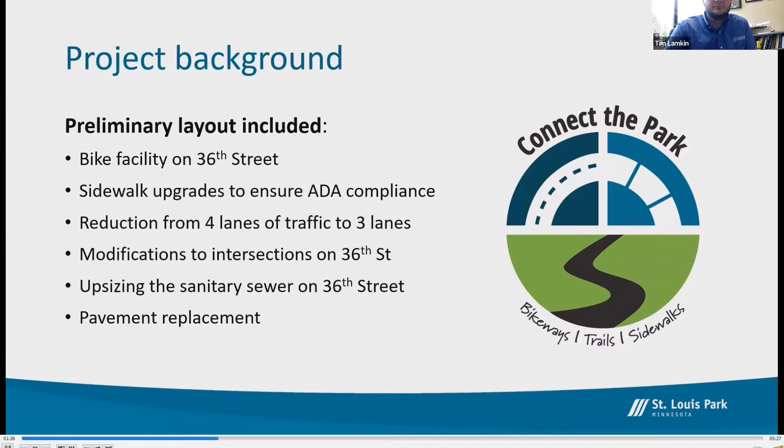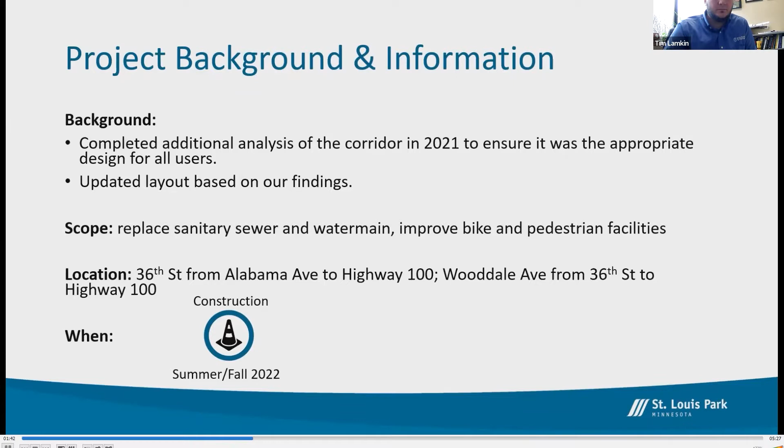The preliminary layout for this project included a reduction in traffic lanes, addition of bike lanes, upgrading of pedestrian facilities, and replacement of the sanitary sewer. With the studies completed, we've better defined the limits and scope of the project. Construction will begin in the summer of 2022 and last until the fall. This project will reconstruct 36th Street from Alabama Avenue to the Highway 100 bridge and include new pedestrian and bicycle facilities, new utilities, and a new roadway surface. The project will also include a new roadway surface on Wooddale Avenue from 36th Street to the Highway 100 ramps.

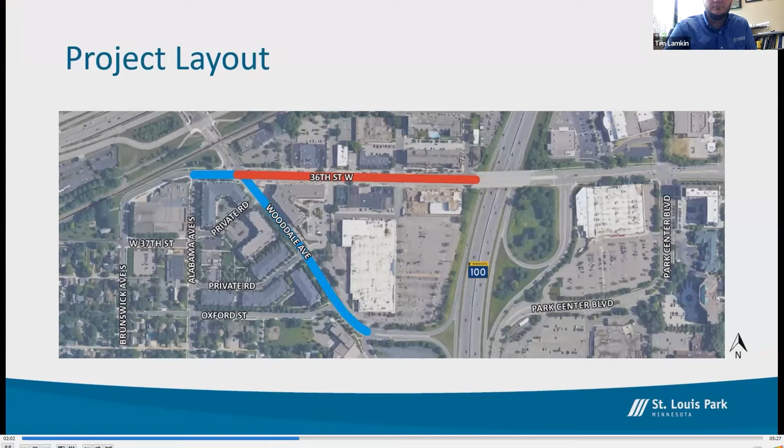36th Street will be reconstructed in 3 stages as shown by the different colors in this figure. Stage 1 consists of Wooddale Avenue and 36th Street from Alabama Avenue to east of Wooddale Avenue. Work for this section includes improved pedestrian and bicycle facilities, signal replacement, and pavement replacement.

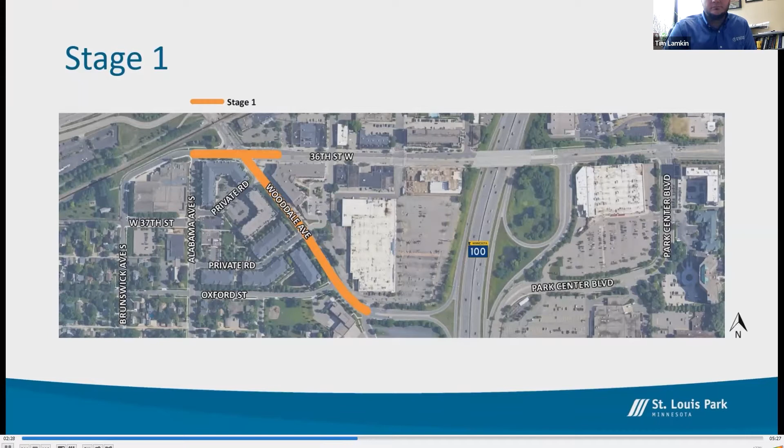The Stage 1 detour for 36th Street is 36th Street westbound to Highway 7 and exiting off on Wooddale. The Stage 1 detour for Wooddale Avenue is Highway 100, Wooddale, or 36th Street onto Highway 100, exiting off at Wooddale, or taking Highway 7 to Wooddale. Access to Oxford Street from Wooddale Avenue will be maintained at all times. One-way access from southbound Wooddale to westbound 36th Street will also be maintained at all times.

Stage 2 consists of 36th Street from east of Wooddale Avenue to west of Zenwood Avenue. Work for this section includes construction of a separated 2-way bikeway on the south side of the corridor. This will connect to a future bikeway planned west of the project as part of the Connect the Park plan. Work will also include full utility and pavement replacement.

The Stage 2 detour for 36th Street is 36th Street westbound to Highway 7 and exiting off on Wooddale. The Stage 2 detour for Wooddale Avenue is Highway 100, or 36th Street onto Highway 100, then onto Highway 7 and exiting off at Wooddale. Zenwood Avenue will remain open to traffic at all times during Stages 1 and 2.

Stage 3 consists of 36th Street from west of Zenwood Avenue to the eastern project limits. Work for this section is the same as Stage 2: adding a separated 2-way bikeway and replacement of utilities and pavement.

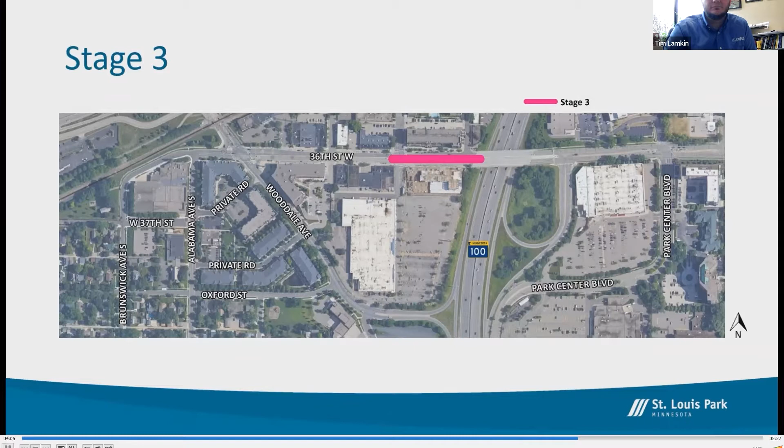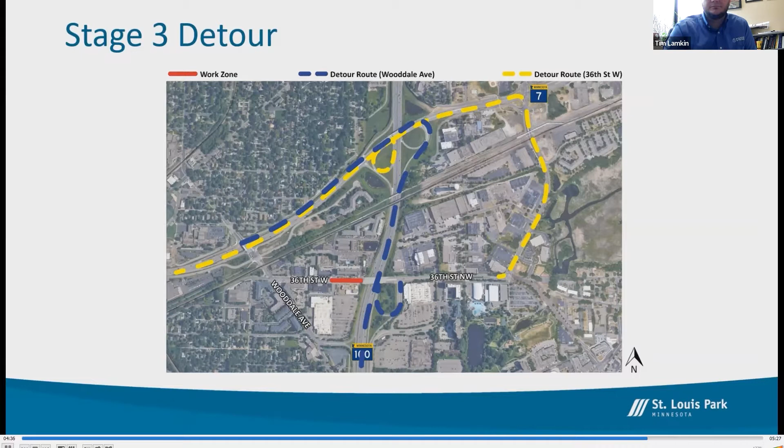The Stage 3 detour for 36th Street is 36th Street westbound to Highway 7. Similar to Stage 2, the Stage 3 detour for Wooddale Avenue is Highway 100, or 36th Street onto Highway 100, then onto Highway 7 and exiting off at Wooddale. Yosemite Avenue will remain open to all traffic at all times during Stage 3. 2-way access to properties south of Zenwood from 36th Street will be provided except during the installation of underground utilities.

Please visit the project website to send us any comments or questions regarding construction. There will also be an opportunity to discuss the project with city staff.

We will have two live question and answer sessions via Zoom, on Monday, February 7th from 2 p.m. to 3 p.m., and on Tuesday, February 15th from 5:30 p.m. to 7 p.m. If you have specific questions or want to talk directly to the project team, please join us for either session. A link to register is on the project website.

If you have additional questions, please contact the city's project manager, Joe Shamla. Thank you for your time and interest in this project.

All right, then next we're going to show a video, not project specific, but generally what to expect during a construction project like this.

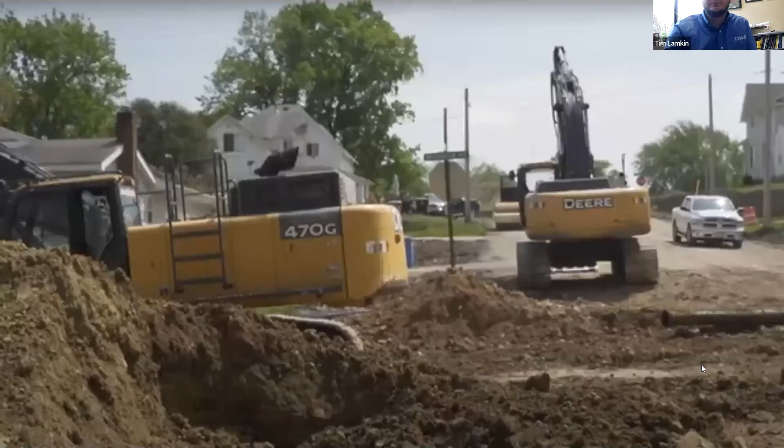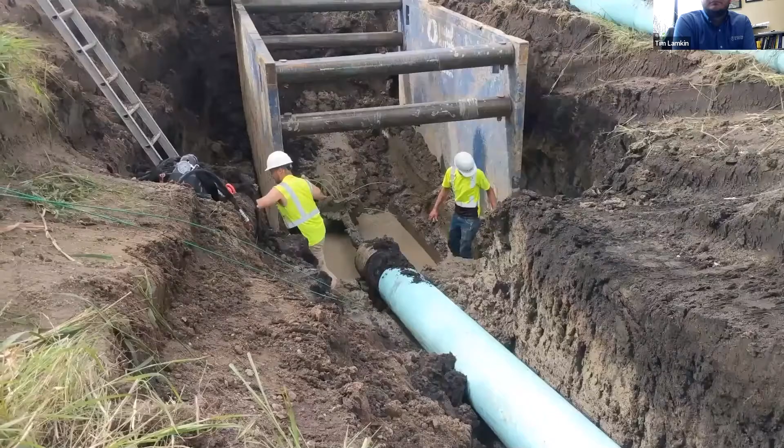Construction is a key element in creating safe, sustainable, and beautiful communities. While there are many different types of construction projects, one cornerstone to maintaining city infrastructure is the full street reconstruction. This involves replacing underground utilities such as water mains, storm sewer, and sanitary sewer, as well as the gravel roadway base, curb, driveways, and pavement, and in some cases, sidewalks.

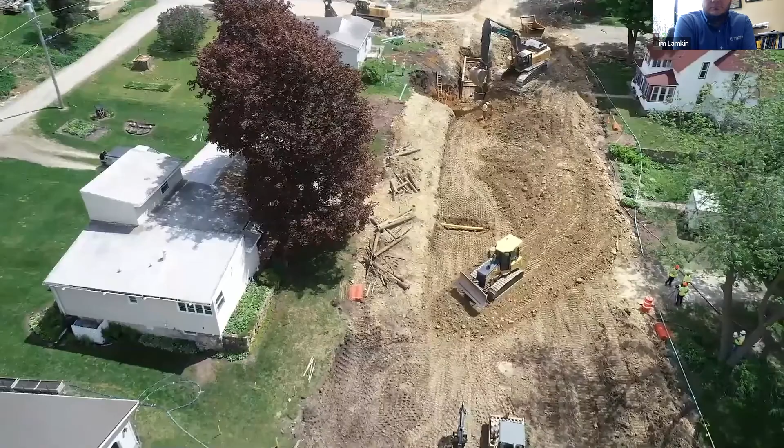While a full street reconstruction is unique to the project area, there are certain processes and methods that can be expected for each project. So, as a resident, what can you expect during construction?

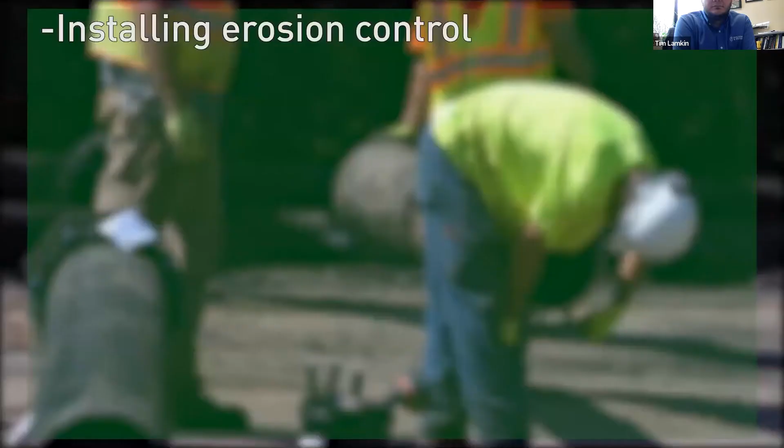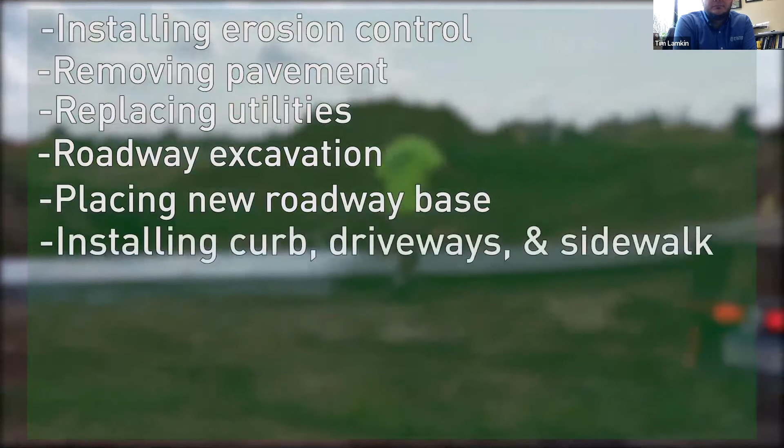Typical construction process: full street reconstruction typically follows installing erosion control measures, removing pavement, replacing the underground utilities, roadway excavation, placing a new roadway base, installing curb, driveways, and sidewalks if included, paving, which can typically include more than one layer, turf establishment, and installing roadway striping and signage.

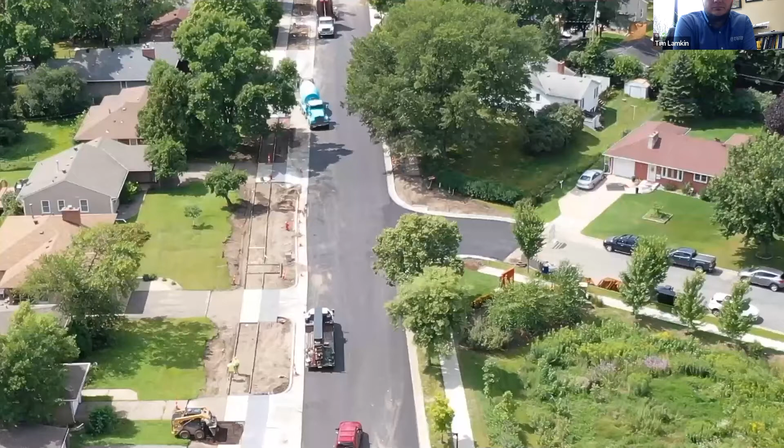During this process, the contractors typically work from 7 a.m. to 7 p.m., Monday through Friday, with some Saturdays, depending on the project.

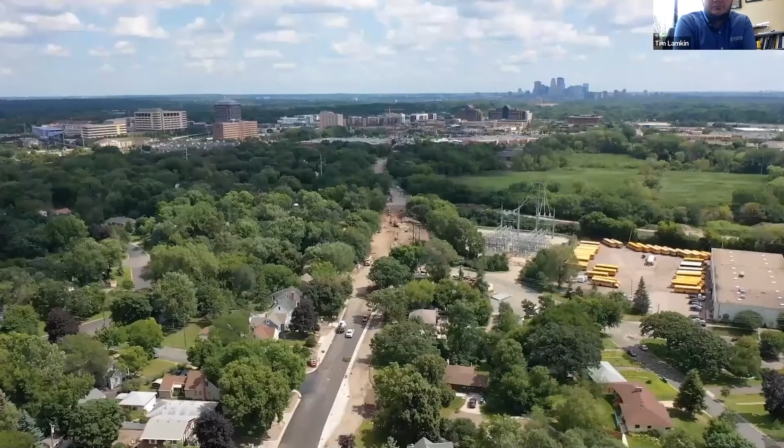During these working days, there will be noise, mud, dirt piles, dust, and other construction-related activities. While it isn't possible to mitigate all of these issues, the contractor will try to limit these disturbances as much as possible, including spraying the road to control dust, and filling in and grading muddy areas.

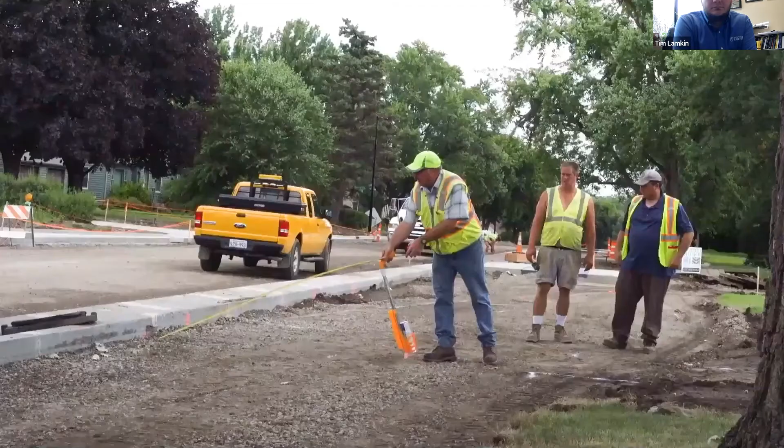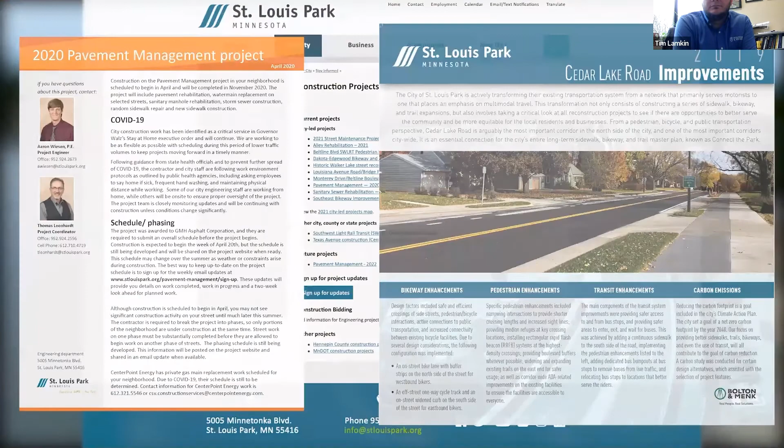Communication from the project team: construction can be an inconvenience, but clear communication of impacts and what to expect can make the process much smoother. Be sure to look for the project website, newsletter, or email update sign-up information at the beginning of the project. This will be a general way to receive updates about construction.

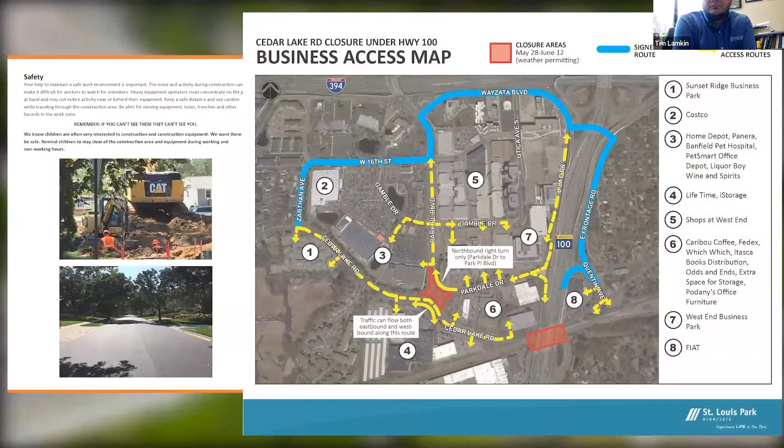Specific impacts to the property, such as water shutoffs, driveway impacts, or others, will be communicated via direct mail or paper notices at your front door. So be on the lookout for these letters during construction.

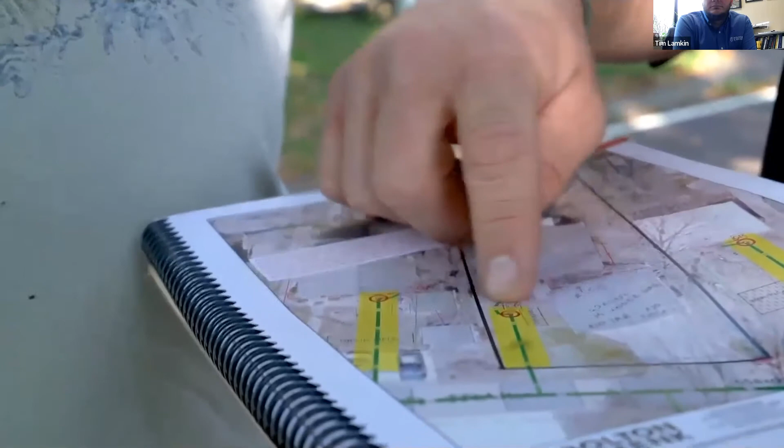While it can be tempting to discuss the project with contractors' personnel, we encourage you to avoid doing so and direct your questions to designated project representatives.

They are connected to the entire project team, are most informed about what is planned for the project, and can best provide you with the information that you need.

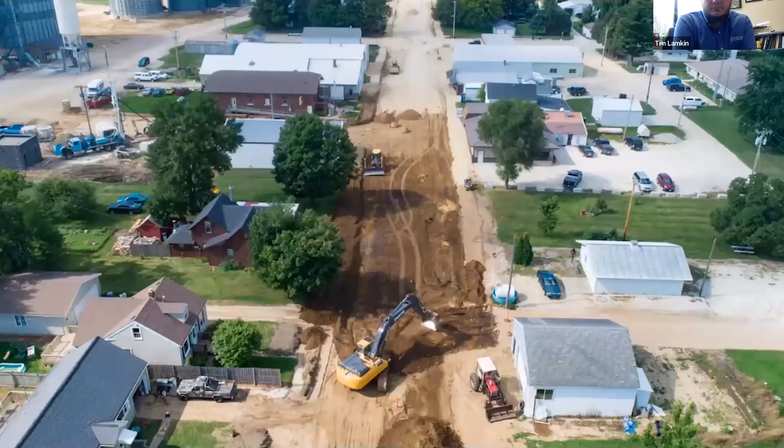Street access. Access to your street can vary during the construction process. When the contractor is digging in the street during utility work, the hole is often as wide as the street, and cars won't be able to pass. During this time, vehicles will have to find alternate routes.

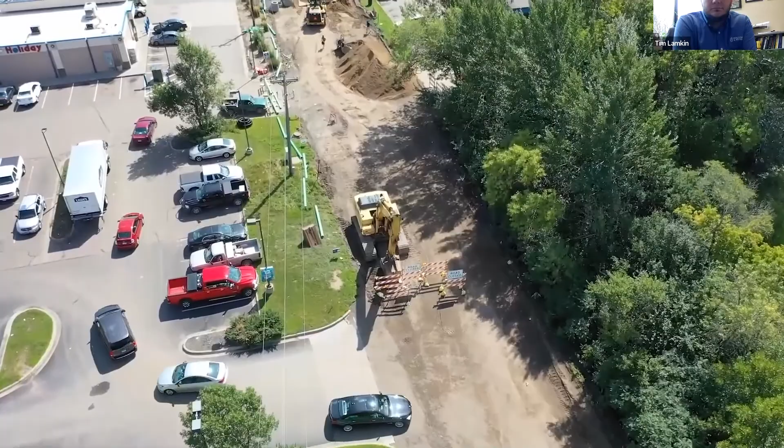Utility trenches will be filled by the end of each workday. If it is a dead end with no other way out, we will work with you to maintain access, but we need your cooperation to communicate with us about this.

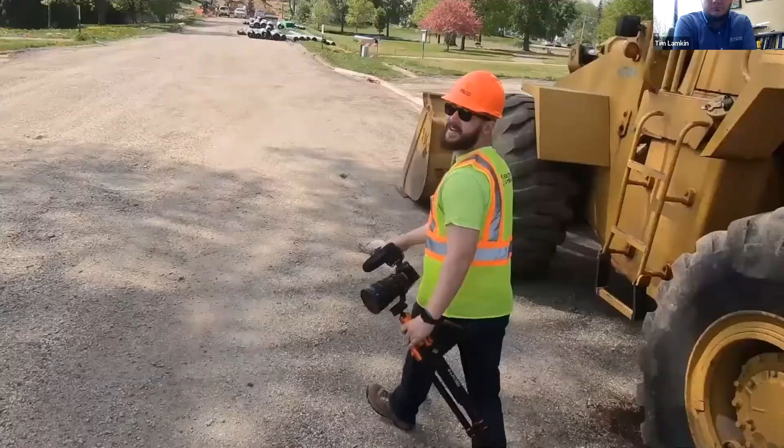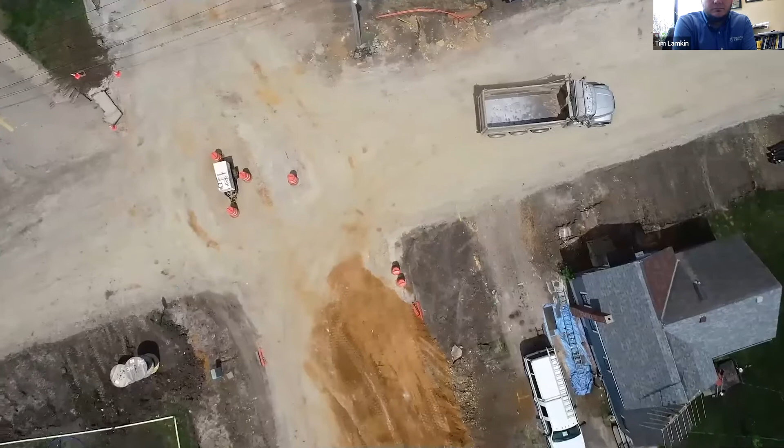When access through the construction zone is possible, it will be on dirt or temporary gravel roads and will be narrow, often one-way paths, and may be muddy after rainfall events. The contractor will work with emergency vehicles as needed to allow for access in emergency situations.

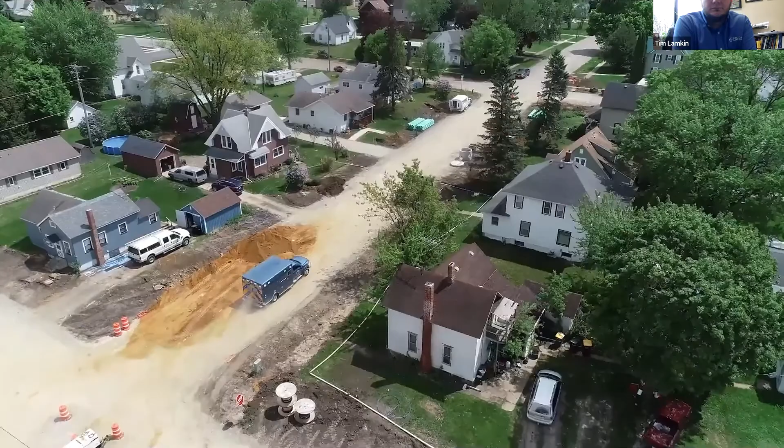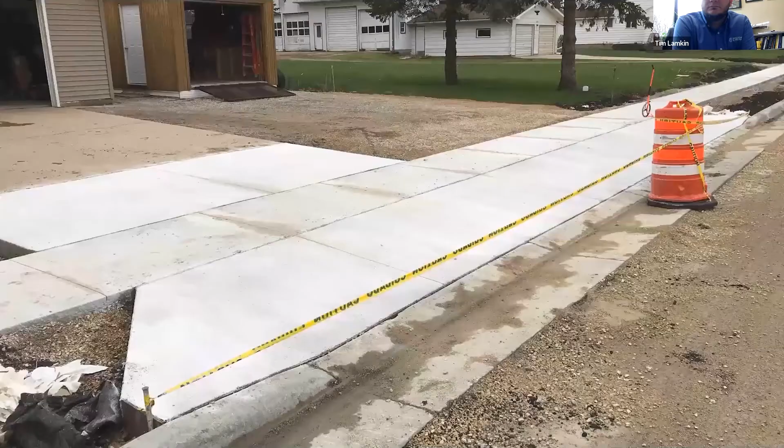Driveway access. Driveway access will vary during construction. Access to driveways will be intermittent and will be provided by temporary gravel ramps. You won't be able to access your driveway during the day when the contractor is digging right in front of it. And that may last for a few hours, several different times during construction.

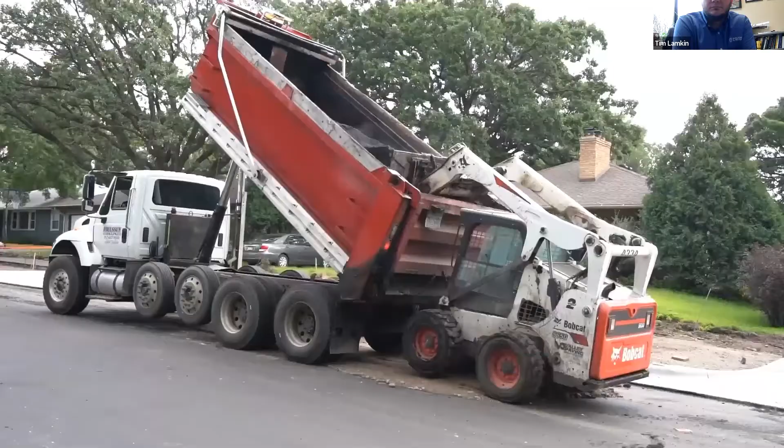In addition, when the contractor is constructing the concrete curb and driveway pavement, you won't be able to access your driveway for up to 7 days while the concrete cures.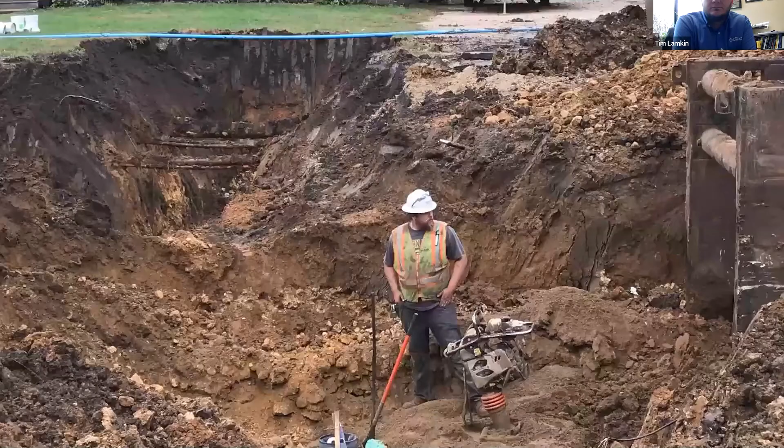Accommodations for special access for elderly or disabled residents may be possible, but these situations will be handled on a case-by-case basis. Please make arrangements to visit with the project team about this separately if you have a need.

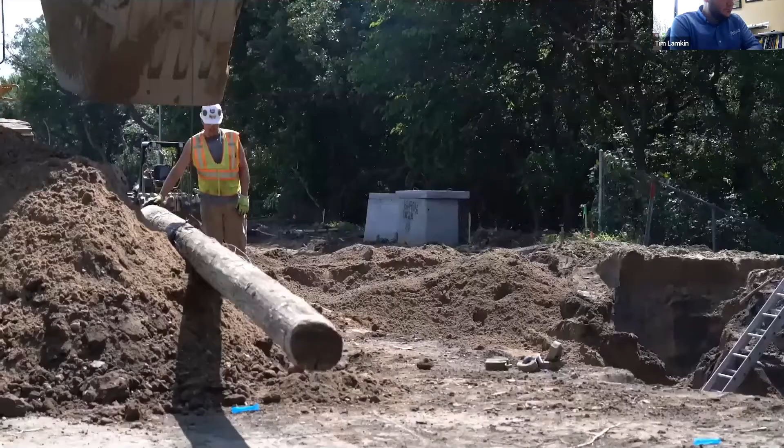It may be possible to provide access accommodations for special occasions, such as a moving day, family celebrations, home improvement deliveries, and the like. No guarantees can be made that access will be available during the time period needed. If possible, it's best to avoid scheduling such events during the construction period and to communicate with the project staff well in advance if they can't be avoided.

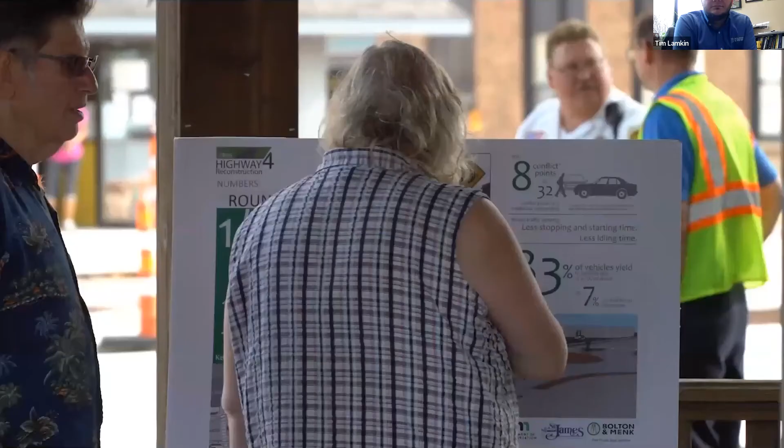Temporary water systems. In order to provide water service to homes during water main construction, the contractor will install an above-grade pipe system constructed to drinking water standards.

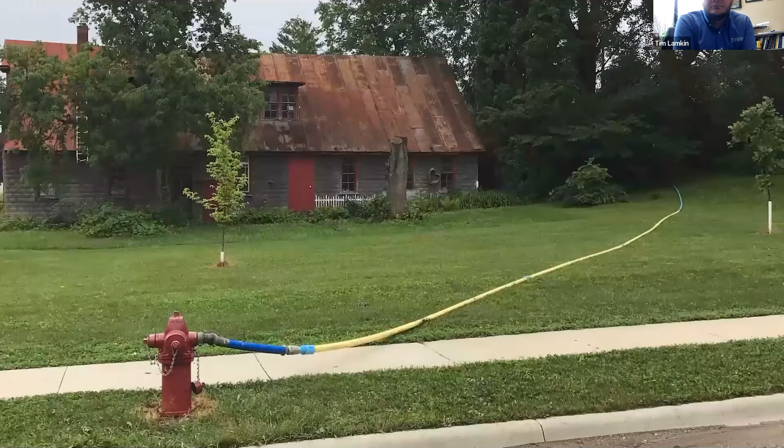The pipes will lay on the surface and may run in rear yards to avoid obstructing driveways where possible. Where the pipes do need to cross driveways, a gravel ramp will be constructed to allow you to cross over the pipe. The pipe system will typically be connected to each home at an outside faucet.

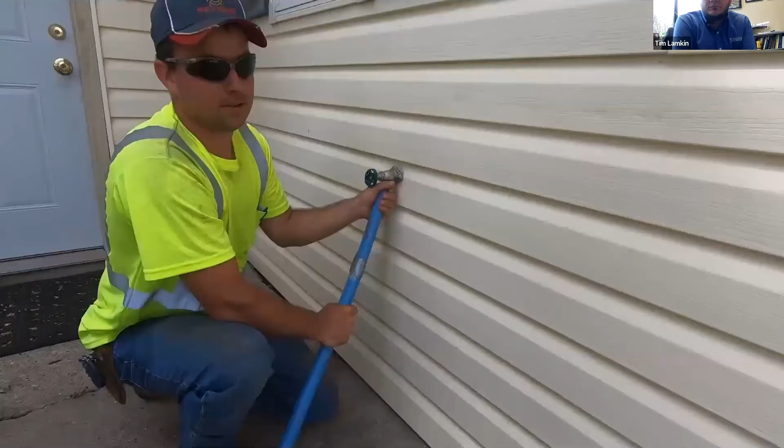Since the pipes lay on top of the ground in the warm sun, you may notice an increase in water temperature at your faucets. Homeowners will receive a paper notice with more information regarding temporary water before the system is installed.

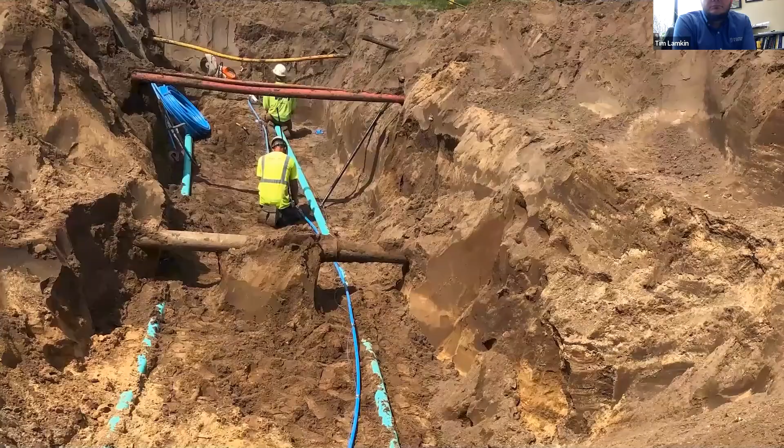Service impacts. Water service to your home may be interrupted periodically during construction. You will be given prior notice of any planned interruptions in water service. Planned interruptions will be limited in length to a few hours and will not occur in the mornings or evenings when water use is of higher demand.

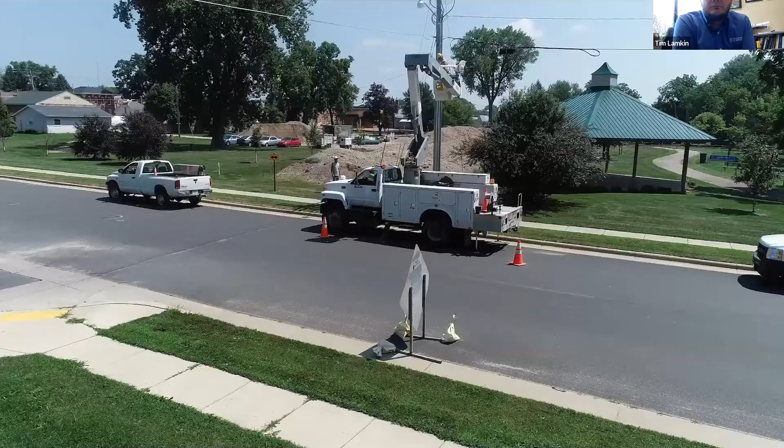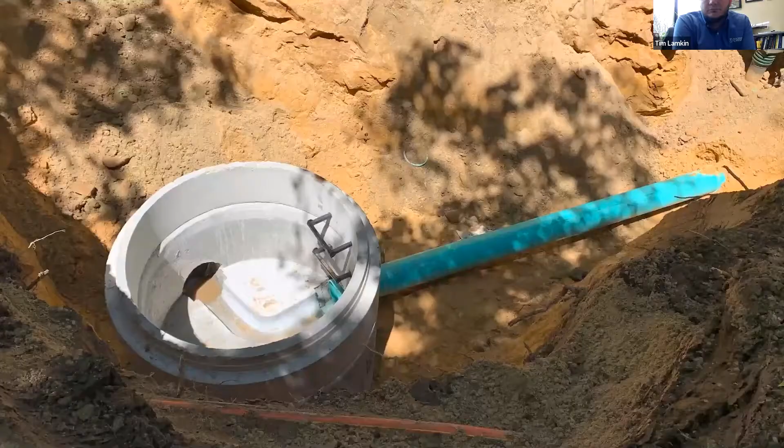However, unplanned interruptions may occur due to accidents or emergency situations. On such occasions, we will do our best to notify you of when water service will be reestablished. Sewer service will typically remain uninterrupted throughout construction, except for emergency situations.

Property impacts. Oftentimes, the contractor will need to dig behind the curb in the right-of-way during construction. The right-of-way is city-controlled property that you may currently be mowing and maintaining as part of your yard.

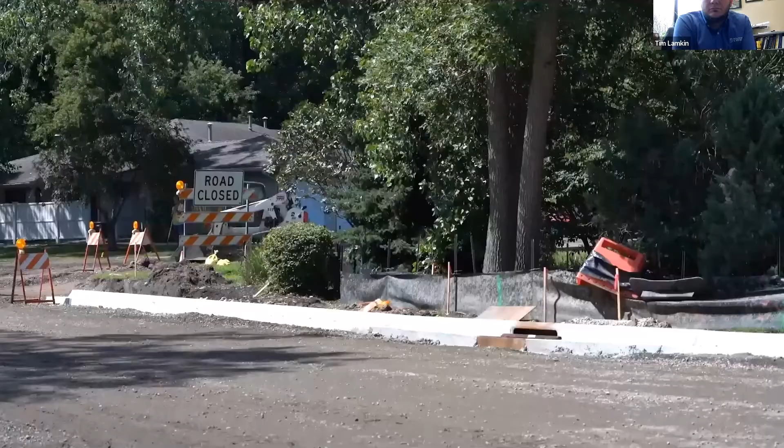While the right-of-way varies for each property, it typically extends to an area about 10 feet behind the curb or the back edge of the sidewalk. To avoid damage, homeowners are responsible for removing private features within the right-of-way, including sprinkler systems, invisible dog fences, or other private amenities prior to construction.

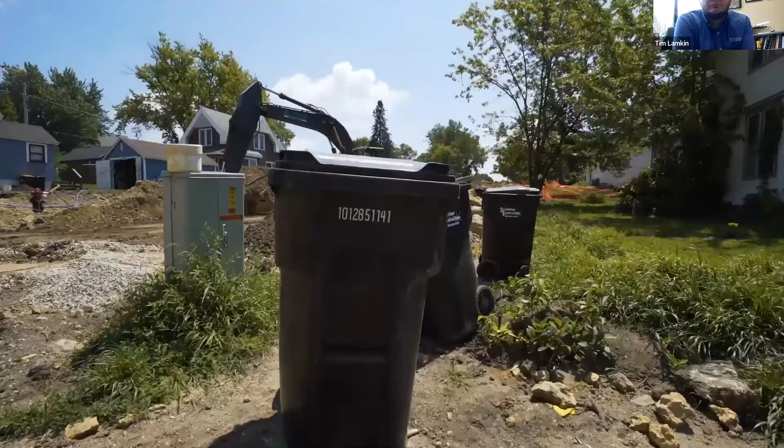Garbage, recycling, and mail. Garbage and recycling pickup will continue on its regular schedule. You should label your receptacles with your name and address and continue to put them out on pickup day as close as possible to where you normally would.

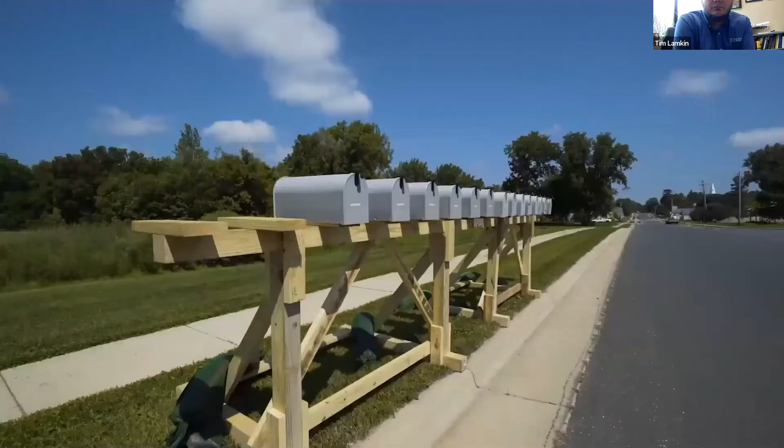If needed, the contractor will pick them up, move them to a convenient pickup location for the hauler, and return them to your property. Mail delivery will also continue through the project. If needed, temporary mailboxes will be installed in a location on a side street or at the edge of the project limits that is accessible for the mail carrier.

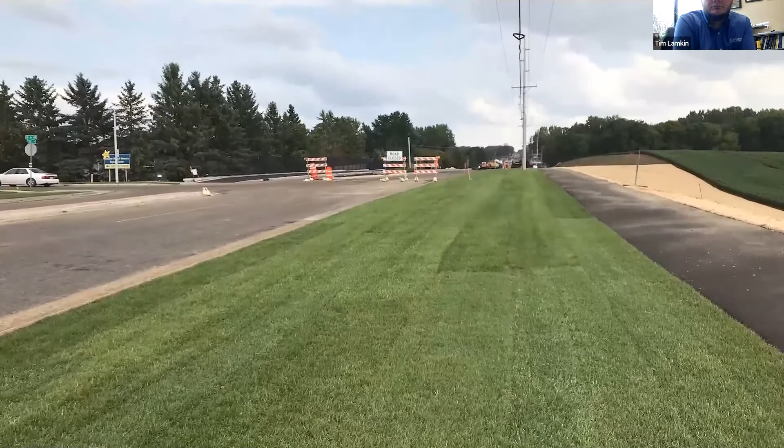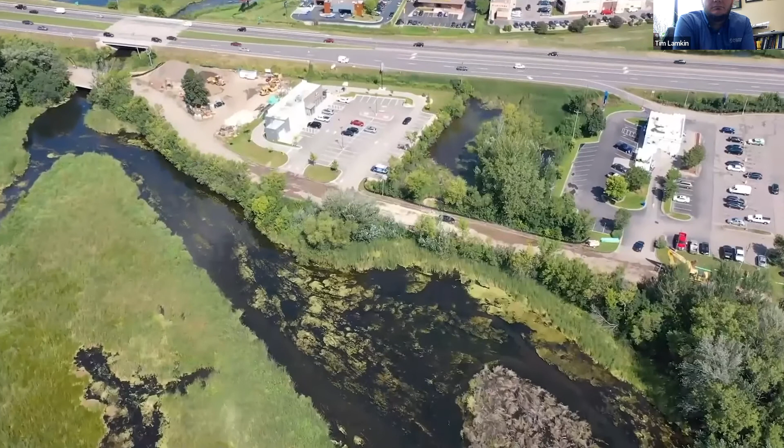Restoration: the contractor will restore turf areas impacted by construction activities, typically placing dirt along with seed or sod. The contractor will generally maintain sod for 30 days and seed until it reaches 70% growth. After this, the homeowner is responsible for the new grass. Water frequently and raise your mower deck to avoid cutting grass shorter than 3 inches during the first months to ensure the best growth.

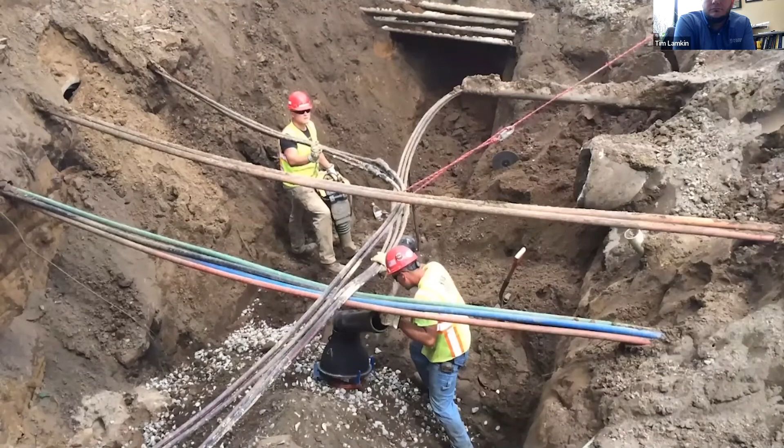Private utilities: often private utility companies such as natural gas, communications, and electrical utilities will also be working in the project area. While this work won't occur under the city's direction, it's often necessary for the project. If you have questions about private utility construction, contact the designated project representative, and they can get you contact information for the various utility companies.

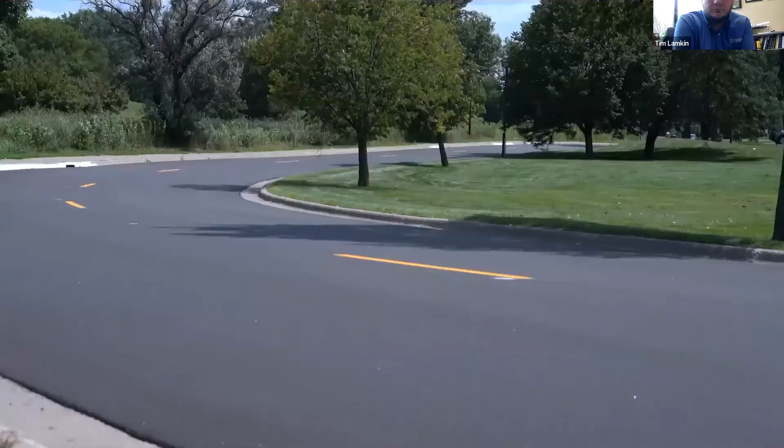End of construction: at the end of construction, the engineer will prepare a punch list of items the contractor needs to address prior to receiving final payment from the city. After final payment, there is typically a correction period where the contractor will be required to address any defective work that is discovered.

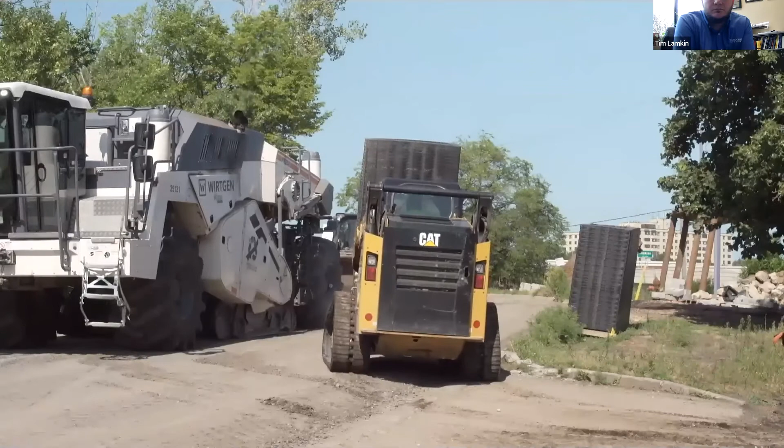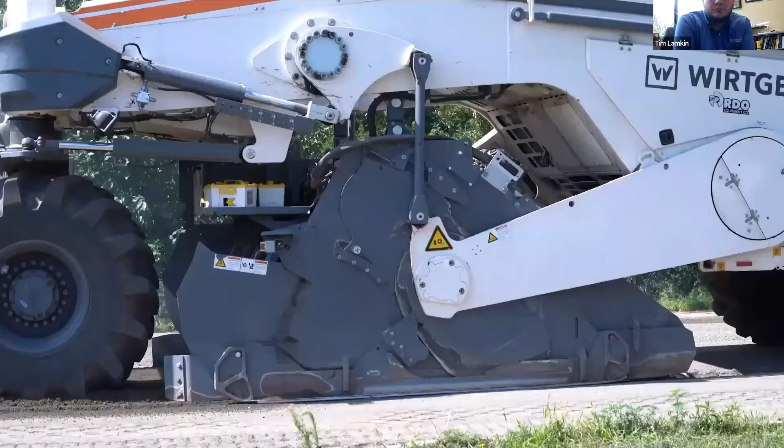While it can be tempting to explore the construction site, please stay well away from active construction zones and equipment. Obey traffic control signage, stay out of fenced-off areas, and never approach an open trench. Keep a close eye on children and remind them to stay away from the construction area. If you have a project safety concern, please contact the designated project representative immediately.

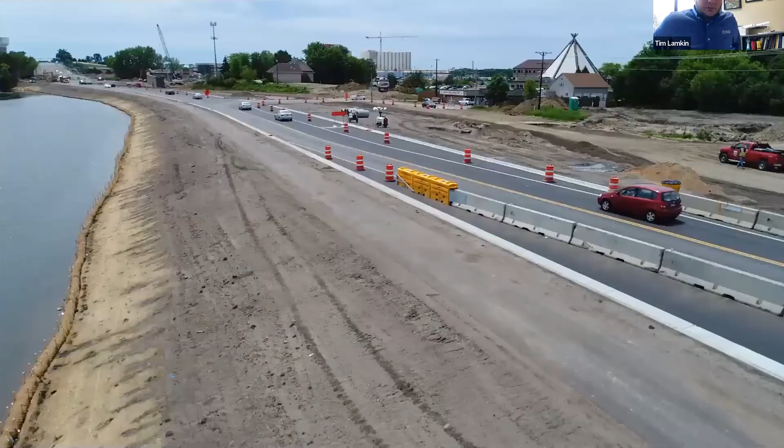We understand that living through a construction project can be inconvenient and frustrating. We appreciate your patience and encourage you to reach out to the project staff with any questions or concerns. While construction can be painful at times, it's a big part of creating a safe, sustainable, and beautiful community, and we're here to help you through the process.

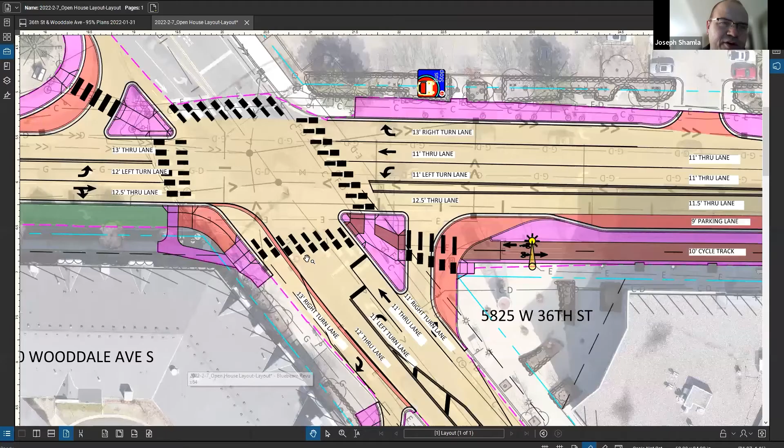I think the main thing with this project is the sanitary sewer replacement. We have a sanitary sewer on 36th Street from Wooddale Avenue to the bridge. That sanitary sewer is up to 30 feet deep. While we're digging, it will be very inconvenient for access. That's why in the presentation you saw different detour plans. At times you'll be able to access any of the businesses, but it will be a matter of which side you're entering from, off 36th Street or off Wooddale Avenue. So there's definitely communication that needs to take place. That's the biggest part of this project, the replacement of that sanitary sewer.

Besides that, if you're not signed up for construction updates on our website, that's the easiest way to stay informed. We'll send emails once a week with project updates. Right now it's probably every 2-3 weeks, but once construction starts it'll be every week. That's probably the easiest way to understand how traffic is moving and any detours that will be put in place before you get there. At any time, if you have questions, please call us. We'll help you as best we can.

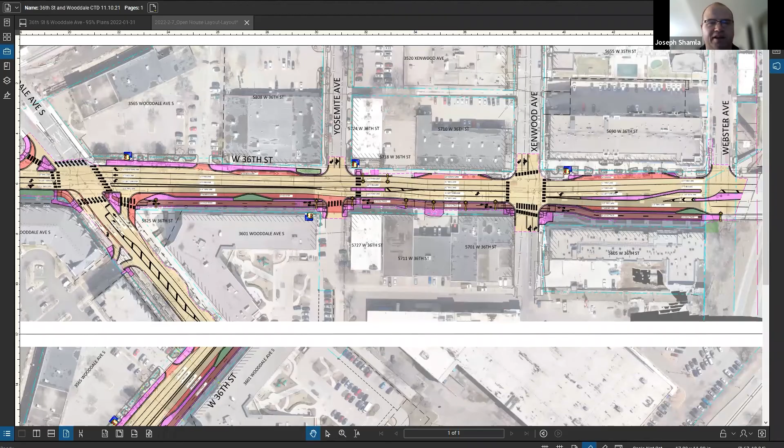We don't expect any late hours that would impact when people might be putting kids down to sleep, but there have been times where something breaks towards the end of the night and they're unable to get it repaired before then, so they have to get it repaired. We don't plan to do that type of work, but there are emergency situations where that arises.

Does anyone else have questions, comments, any type of feedback? The website is a good spot if you've got questions after we log off today - please shoot us an email. Somebody on the project team will get back to you as soon as we're able.